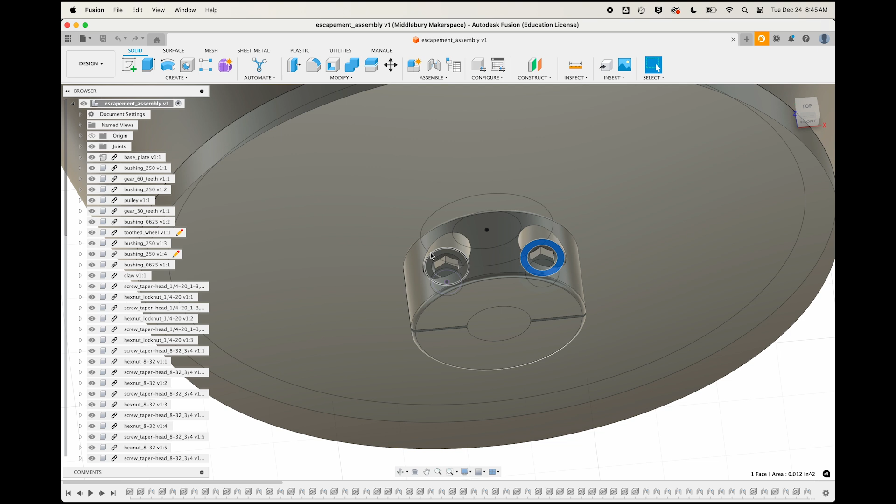And we're not going to 3D print these tiny little 4-40 screws down here on the collar clamp at the bottom of the weight cup. We're also not going to 3D print this 36-inch long 1/4-inch wooden dowel rod. We're just going to get all that stuff at the hardware store and we're going to move on with our lives. It's not worth it to try to 3D print everything, and it often makes no sense.

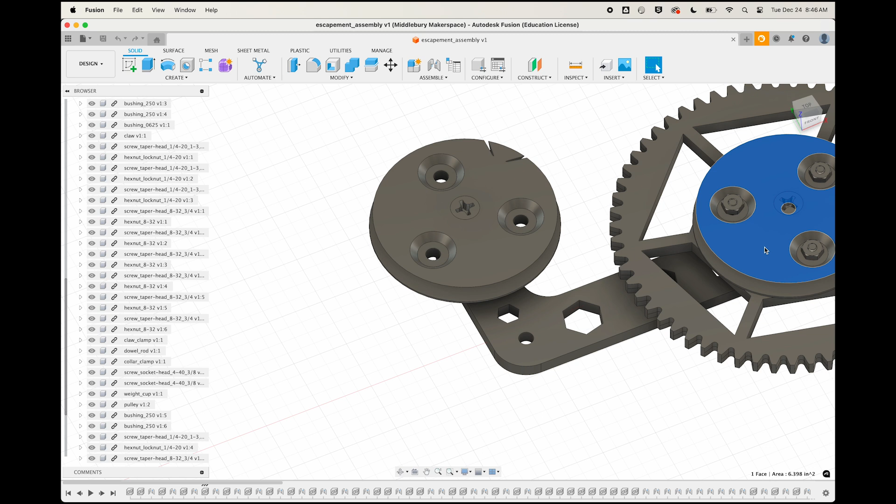3D printing is an excellent technology for some solutions, and we're going to prioritize those. Great. Let's export the rest for 3D printing. But how? Well, look at this pulley. If I select it and find it in the project hierarchy, I can find that it is called pulley. And if I open up my data panel, I can find where it came from, the pulley file.

I could open this up and export from here by going to the File menu and selecting 3D Print, setting my preparation type to export, and then selecting the pulley as the object that I want to export, making sure my format is set to STL binary, the standard triangle language that will work with any 3D print prep software,

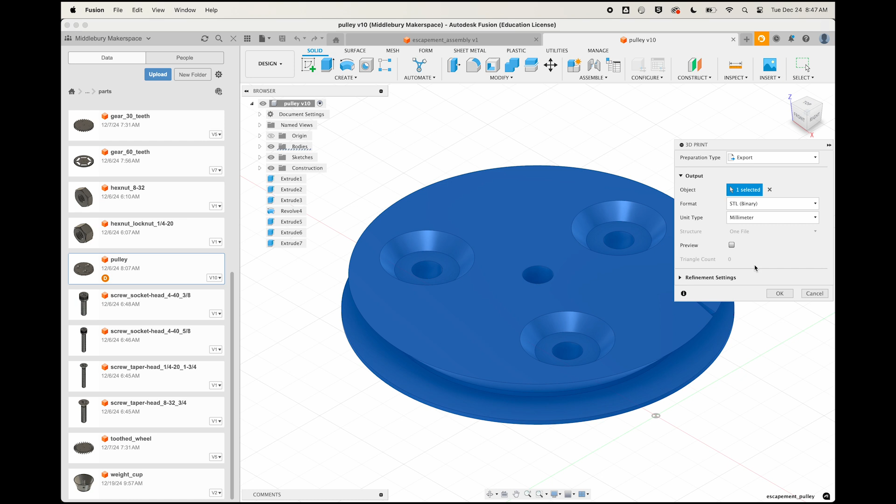making sure my unit type is correct, and I'm going to be using a Bambu Lab X1C printer, so I'm going to use millimeters because that's what that tool expects. And the rest I'm just going to leave alone. I'm going to click OK, and I am going to allow this file to be exported out of Fusion onto

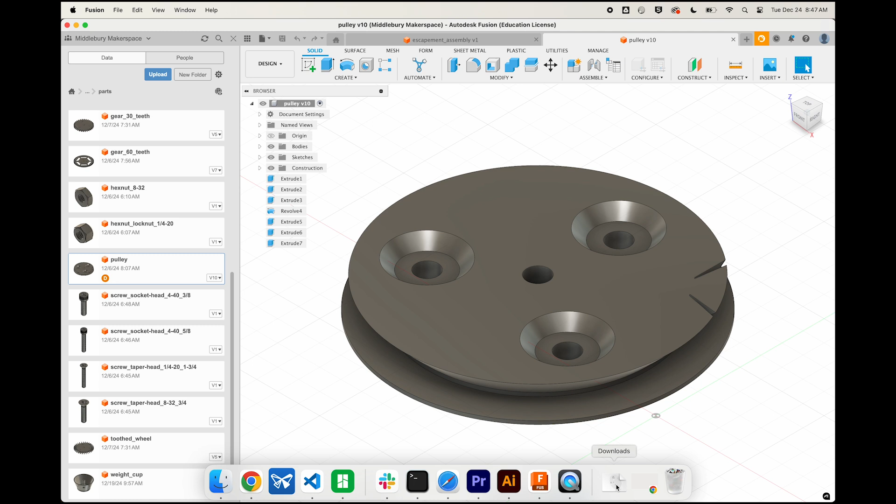my computer's downloads folder. And I'm going to notice that its name is correct, Escapement Pulley, so that I can find it more easily when I have a pile of these STL files in that downloads folder. Click Save, and there it is in the downloads folder. Great. I can export this way, but I can also export straight from the assembly file.

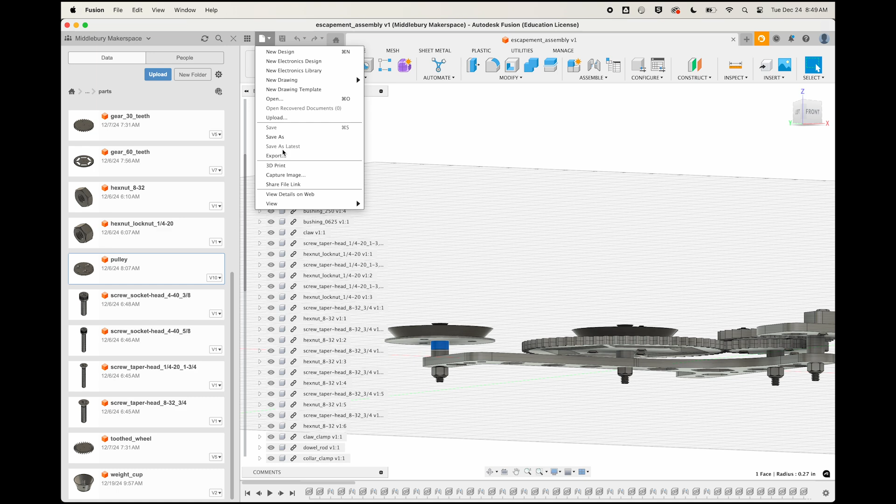The process is the same: File, 3D Print, and then select the object you want to export, and just click on it right there in the assembly file. When you've got a lot of parts to export, this is the expeditious manner in which to do so. So let's do it. We need one of each kind of part. There are 2 pulleys in this assembly, but we only need to export one of them. We will duplicate to the right quantity when we're at the print prep software.

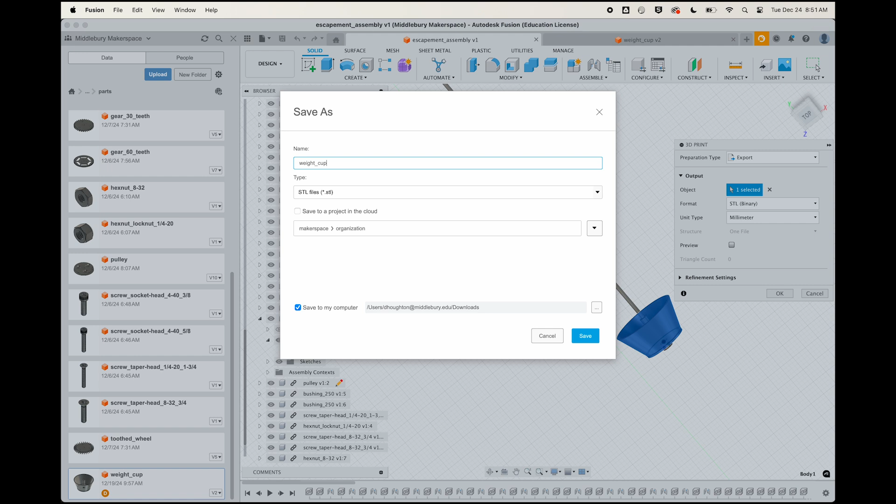So work your way through all the parts until you have one of each in your downloads folder. And if any of the parts still have their default name, like this one, Body 1, go ahead and name it descriptively. This is the weight cup, so I'm going to name it Weight Cup. It's so easy to get confused if you don't take a moment to name your files.

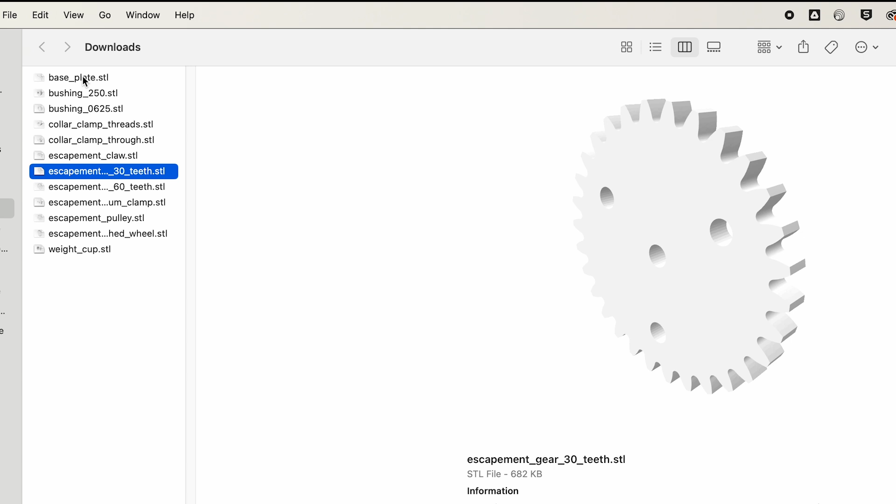Here's what I ended up with, and you should have the same. And you could study this list, or you could just look at the assembly and ask, did I get one of each kind of part that I'm not going to buy at the hardware store? Good. We have exported STLs.

It's worth noting at this point that the moment you export an STL, you are triangulating your mesh. You are turning your 3D geometry into a bunch of triangles that approximate the shape of that 3D geometry. They do not perfectly represent it. The huge win, the reason to export as STLs, is that it allows us to import those files into our 3D print software. The downside is that we've essentially downgraded our model into something much harder to make edits to in the future. So keep this in mind.

You want a workspace where your parts are perfect. That's Fusion, where you can edit the geometry in its perfectly defined geometric state. And you need a mechanism for exporting out of that tool into the variety of 3D printer options on the market. So in Fusion, click Upload, and bring one of those STLs, the 60-toothed gear, back into Fusion to see

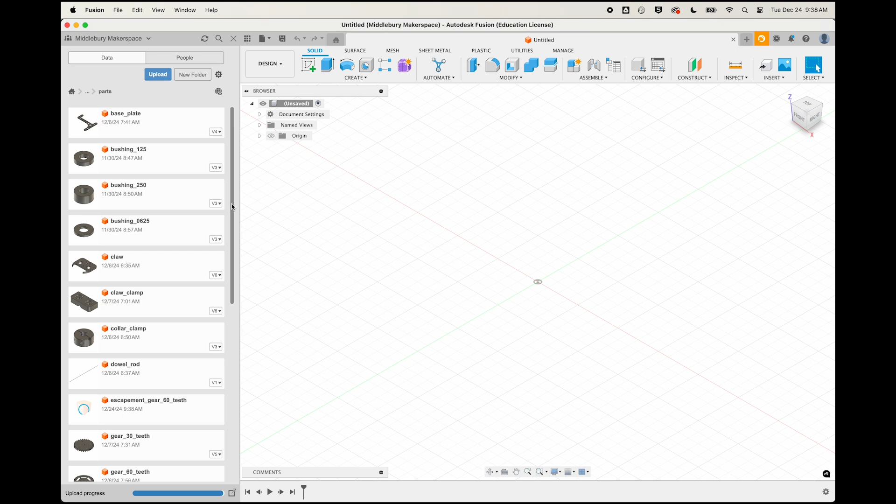the difference. Open up the STL version, the Escapement Gear 60 Teeth, and then also open up the Fusion file, Gear 60 Teeth. Notice how with Gear 60 Teeth, the Fusion file, with the Select tool, I can select all the different components of the gear. The top face, this arc between 2 of the teeth of the gear, this arcing face that runs down to the bottom of the gear.

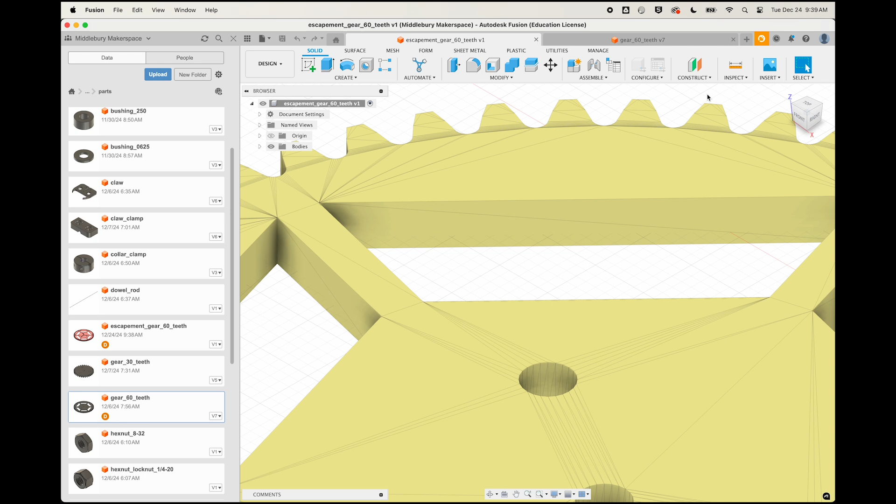But with the STL file, notice the messiness of all these somewhat randomly arranged triangles trying to approximate this shape. I can no longer select any individual components. I can only select the entire object or nothing at all. So use Fusion for creating, editing, modifying geometry in a perfectly geometric way, and use the STL file format for getting out of Fusion and over to the 3D printer, because that's what we're doing next.